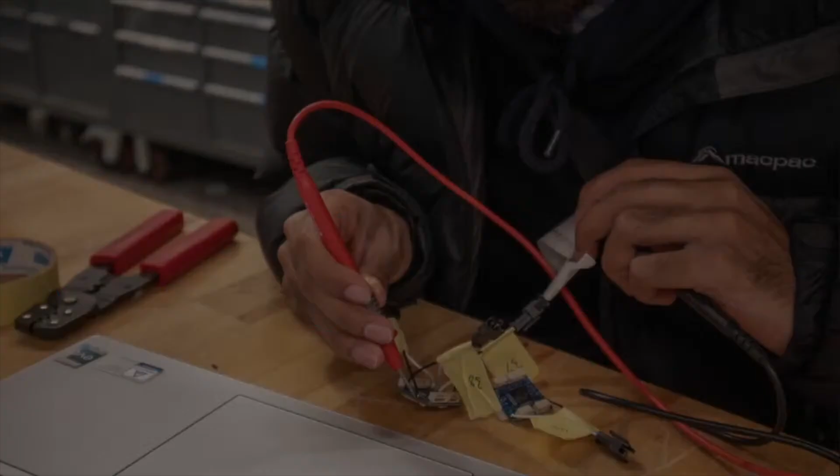The avionics section is responsible for bringing our aircraft to life, designing and implementing onboard electrical systems vital for the function of our aircraft. At the core of MUAS's search and rescue mission are many of the projects within this section. And as you'll learn tonight, the technologies they are developing have the real potential to advance drones in the humanitarian field. This team is led by Ethan and Emma.

Flight operations, led by Nicholas and Saskia, are responsible for turning designs into reality. They handle the final integration of systems, ensuring the aircraft is flight ready. During missions, they manage ground station operations, analyse telemetry and flight data.

Our incredible pilots oversee both manual and autonomous missions. They ensure safety and precision in every flight. This year, our lead pilots are Rohan and Hamish.

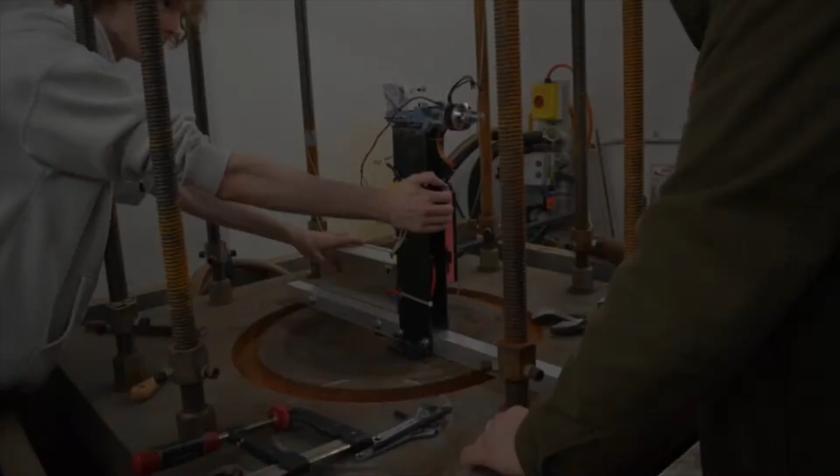Propulsion, led by Say, is a relatively new section, but despite that, this section will push MUAS further than ever before. By developing custom components, including motors, ESCs, propellers, and more, propulsion aims to outperform the off-the-shelf products that we have always employed, in turn improving our capabilities at competition. With the innovations of this section, our drones will fly further and faster than ever before.

And the section that holds us together, operations. From managing relations with partners, running outreach programs, recruitment, and general logistics, this diverse section ensures the smooth functioning of our team, this year led by Darren.

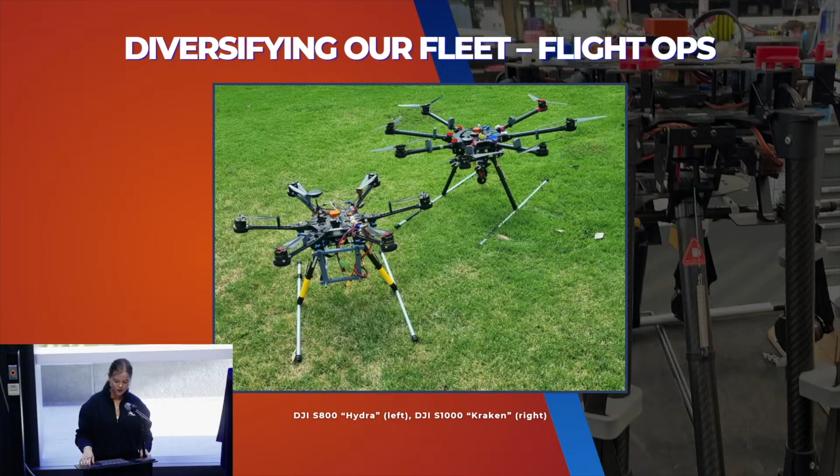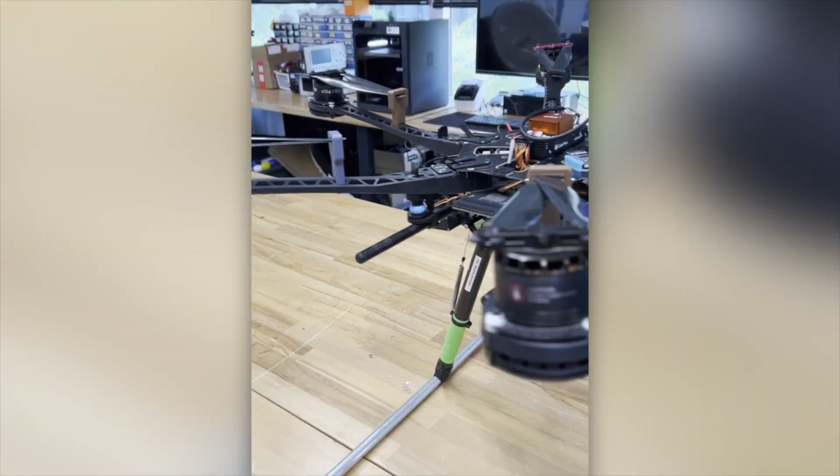Over the course of 2024, Flight Operations has modified our 2 existing DJI platforms, the S800 and the S1000, in order to allow avionics to test their projects. These drones have been adapted with Cube Pilot Cube Orange flight controllers, HERE 4 GPS units, and 900 UX RFDs, as well as other additions.

The S800 is our 6-rotor multi-rotor, also known as the Hydra. This drone has typically been used for testing the avionics vision projects, as well as helping to train our remote pilots.

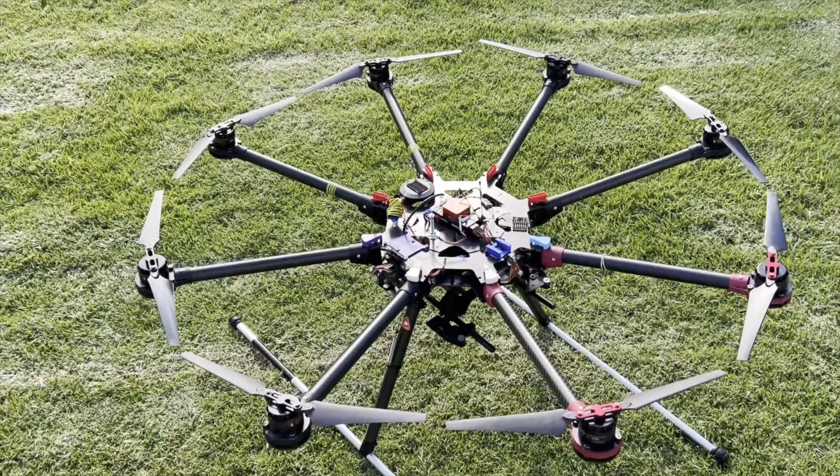The S1000 is our 8-rotor multi-rotor, also known as the Kraken. This drone has been used predominantly to test the avionics Lifeline project, but has the capability to test any of the avionics projects. Further changes have been made to some of the structural elements of this drone, such as adding mounts and redesigning the rotor arm clips, to better help flight operations do maintenance on the drone more easily.

Prior to having these drones, avionics required the team's previous drone, the Albatross, for all their testing. Due to the size and complexity of this aircraft, it proved inefficient when wanting to test these projects at short notice, as it requires a lot of equipment and personnel just to test a small upgrade to a project.

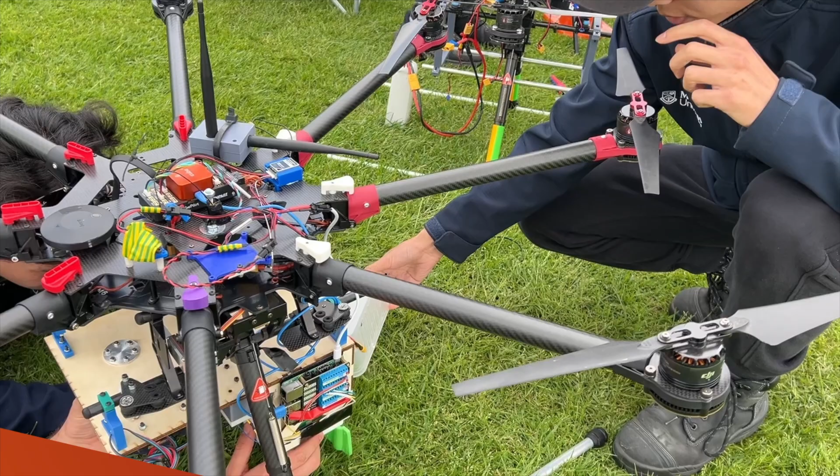In our pursuit of aiding humanitarian rescue, we are excited to present Project Lifeline. Initiated in 2023, Lifeline's purpose is to develop a robust payload deployment system that can deliver a box full of medical supplies from our aircraft to a patient in need on the ground during search and rescue operations.

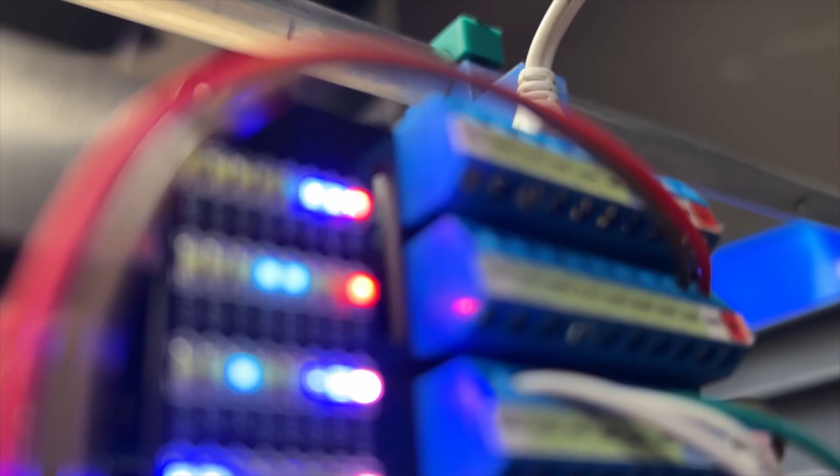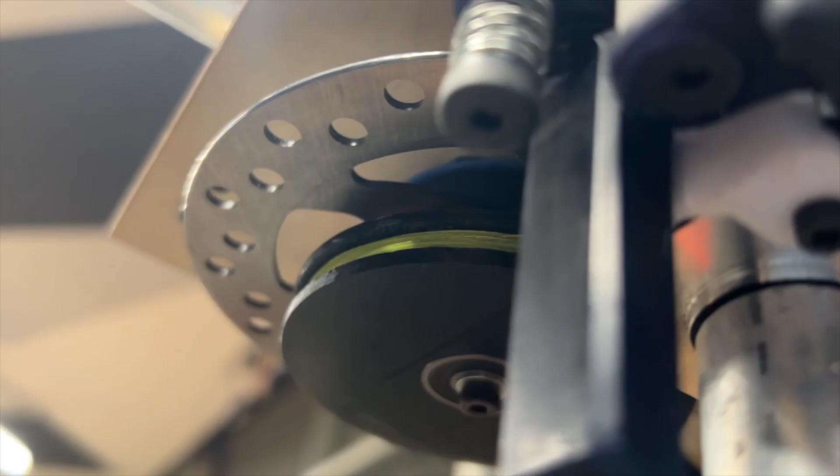The system is controlled by a Raspberry Pi, programmed to receive specific MAVLink signals from the ground control station and act accordingly. Once it is time, the payload will descend to its targeted location via a tethered freefall. Multiple PI control loops are employed in our braking mechanism in order to ensure a smooth and safe deceleration as the payload approaches the ground.

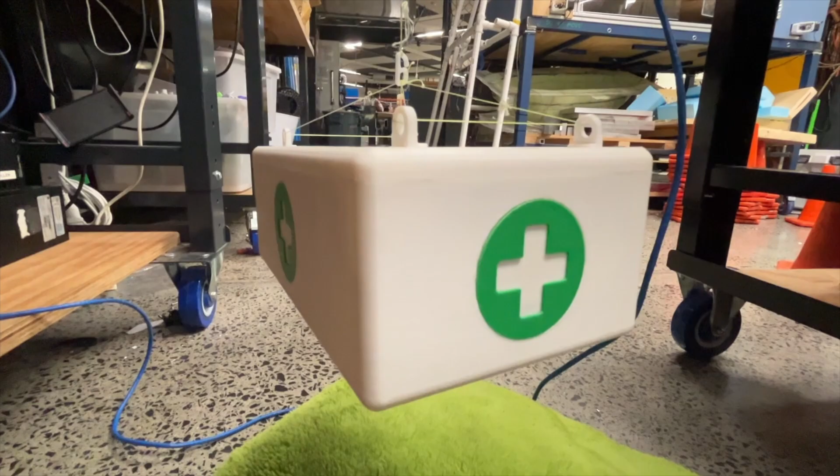Eventually, the payload will be slowed to a stop a few centimeters off the ground before our final release. Lastly, to fully release the payload from the aircraft, a nichrome wire is heated to burn and cut the cables in a fraction of a second, allowing the payload to fall onto the ground quickly and safely.

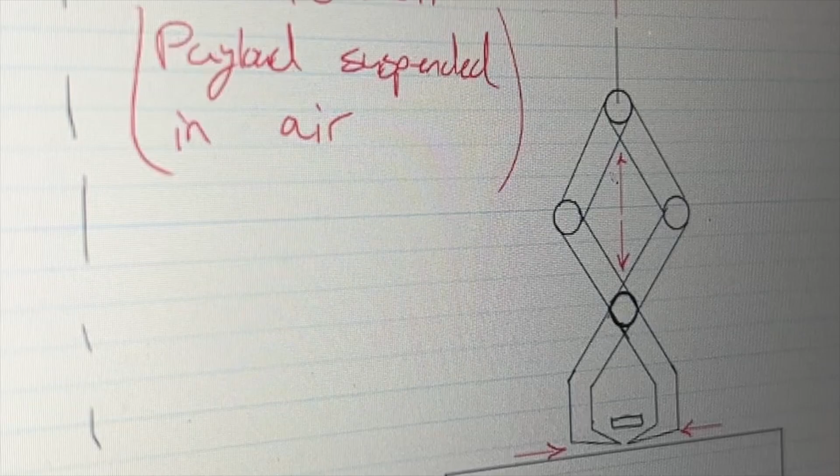Lifeline has come a long way since we started, and we are not planning to stop anytime soon. A newer, improved release system is being designed that releases the payload through a mechanical latch before winching the remaining cables back into the aircraft, eliminating cable wastage.

I'm excited to present the Vision Project, a system designed to detect patients and provide highly accurate GPS coordinates using artificial intelligence. This technology has the potential to improve search and rescue missions by enhancing our ability to visually locate key objects, such as patients in distress.

Over the past year, we've made significant progress in advancing Vision's AI model, software, and hardware. On the AI side, we've expanded our mission objectives and capabilities. Originally, Vision focused on detecting patients, but now it can recognize key objects crucial for rescue missions, including tents, backpacks, clothing, fire, and more. These additions provide more context and improve situational awareness during rescue efforts.

Software improvements include AI model switching mid-flight, which allows us to optimize detection based on various terrains. We've also begun developing a map generation function capable of creating a Google Earth-style map to help rescue teams locate the patient more effectively. On the hardware side, we've continued improving the gimbal system, which stabilizes the camera and allows precise directional control during flight.

We've also refined the mounting and dampening system to improve the quality of our footage. These advancements bring us closer to making Vision a powerful and reliable tool for real-world applications. Moving forward, we aim to refine these capabilities, enhance integration with rescue operations, and explore night vision functionality.

The competition consists of two main segments: performance and endurance. In the performance flight, our drone will be tested across a range of capabilities, as shown in the diagram behind me. This flight sequence includes a high-G maneuver, which in our case will be a vertical loop, as well as a controlled glide and two maximum and minimum speed runs.

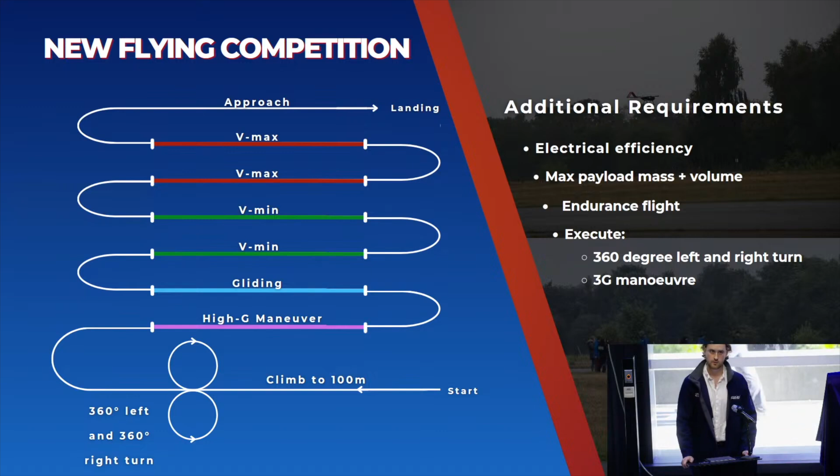Now, the endurance flight, while a seemingly simple concept, is one of the biggest challenges of the competition, and as such carries a significant weight in the scoring. Essentially, we must fly as far as we can using as little energy as possible. And for the first time tonight, I can reveal one key aspect of our competition entry: our aircraft will be a fixed-wing, conventional takeoff and landing drone. But that's all I can say for now, and more will be revealed throughout the showcase. Thank you.

With the NFC competition guidelines and requirements known, the team embarked on an incredible task of designing and building a brand new aircraft to compete. I don't know about you, but I've certainly noticed a rather large object in the middle of this room that we have yet to see. Well, all your questions will be answered shortly.

But before we get to that, we have put together a presentation that details the birth of our New Flying Competition, or NFC, aircraft—an aircraft called the Peregrine. From design to reality, here is how to build a drone. First up, please enjoy this short video on the initial conceptual design phase.

Here, we began to turn our early ideas and scoring optimizers into something real. Our mission at NFC 25 is to score higher than the hosting team in these categories, each with their respective weighting factor. After carefully evaluating the constraints, our priorities, and the design complexities of each category, we've chosen some to be our control variables and the rest to be parameters to optimize for.

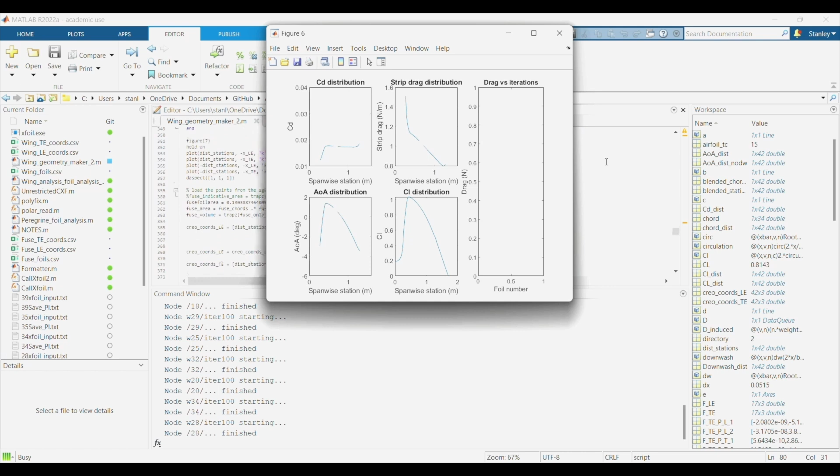With a few parameters to work with, we began development of our in-house optimizer, Athena. Athena is able to iteratively tweak the control variables, compute the dependent variables, and calculate the respective score using a method called gradient descent, a popular optimization algorithm often used for machine learning with multiple variables. In our case, this helps us determine the best configuration to maximize our score.

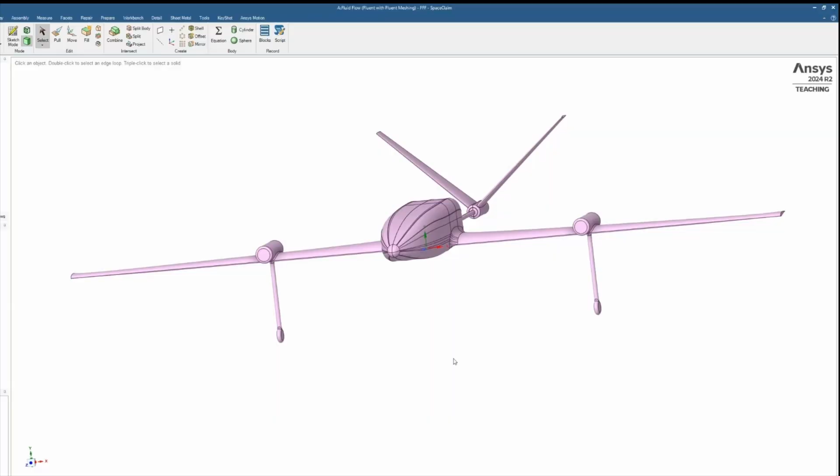Our team was able to create a CAD model parametrically with Athena's output as we moved on to a higher fidelity analysis with ANSYS's Fluent Computational Fluid Dynamics, also known as CFD software. CFD provides a better insight into the prototype generated by Athena, as our design team made subsequent adjustments to the geometry to ensure that the final model has similar, if not better, performance compared to the Athena model.

Hello everyone, I'm Say and I'm propulsion lead for this year. Propulsion has been hard at work for the past year since its conception. With a strong cohort of now 16 members, we have been diligently researching and developing our various components in the propulsion system. The past year has involved rapid development and growth of both our knowledge and technical skills in areas that have rarely been touched by us before.

We have managed to produce and test custom designed propellers and electronic speed controllers, and are very close to making our first motor. These are what we have done so far. From here, we plan to optimize our designs and improve our system as a whole by incorporating a constant speed unit into our system. This next section of how to build a drone will showcase our initial CSU and ESC designs and our current development on our motors, and how we have been aided by the use of FEA.

We will also be showcasing our propellers and how we have validated their performance on our thrust test stand, the Cassowary. Inverters, also known as ESCs, handle the driving and controlling of the main propulsion motors.

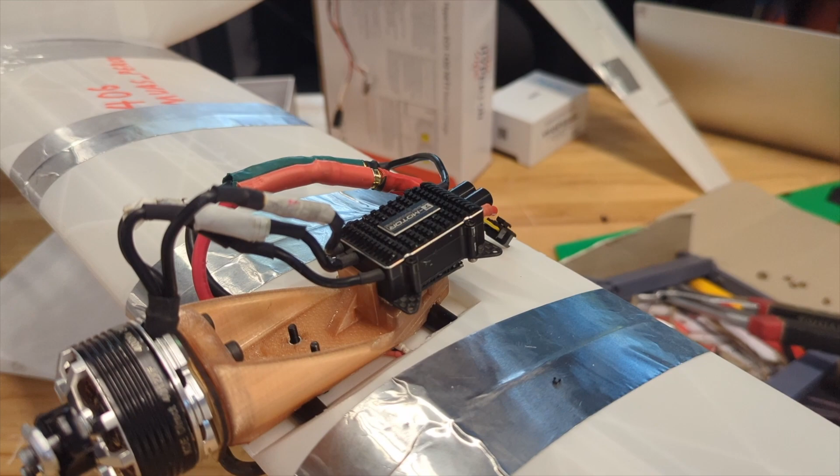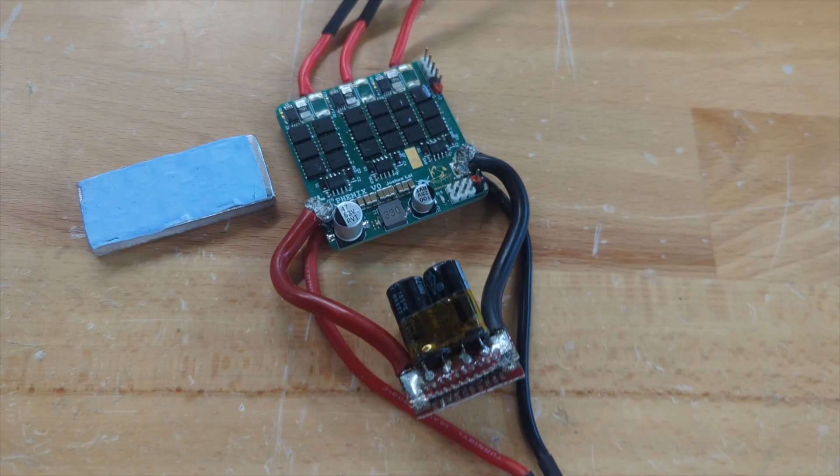The Inverters project aims to replace the commercial systems currently used on Peregrine and other UAVs with custom-tailored solutions that integrate the functionality of multiple previously individual systems to deliver greater efficiency, repairability, and value. Although we are a small project that was founded just last year, we've already delivered a proof of concept called Phoenix V0 that has validated our design, manufacturing, and testing processes.

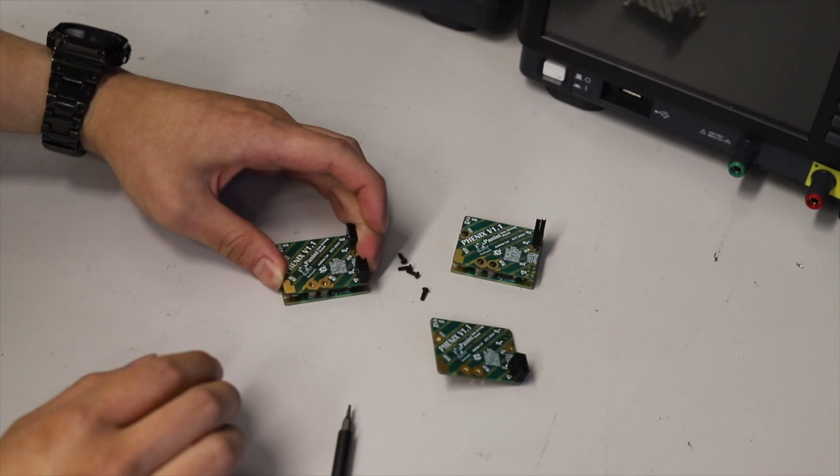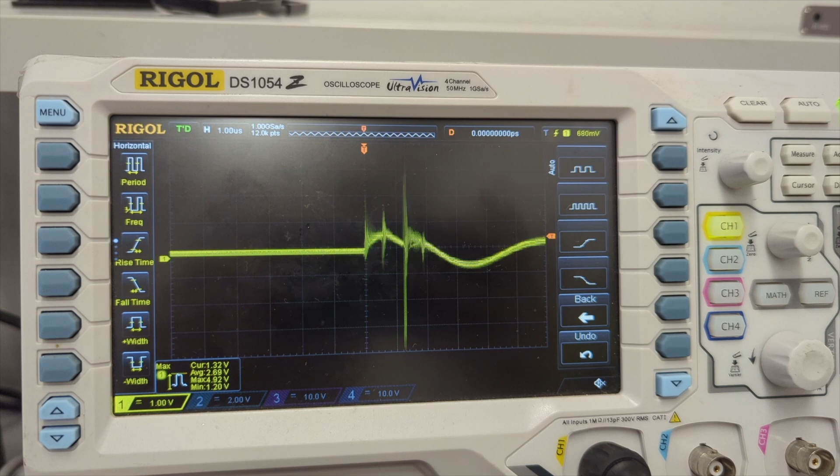We are currently in the testing phase of our next generation system called Phoenix V1, which incorporates a fusion of open source and in-house technologies that give us the edge over the competition. Our innovative modular design allows for fast testing and validation, as well as a unique level of configurability and repairability. Our integration of the advanced FOC algorithm with closed-loop control improves motor efficiency and torque across the entire speed range. All these innovations will yield significant improvements to propulsion efficiency, performance, and reliability. We aim to complete our design validation and have our inverters flying this year.

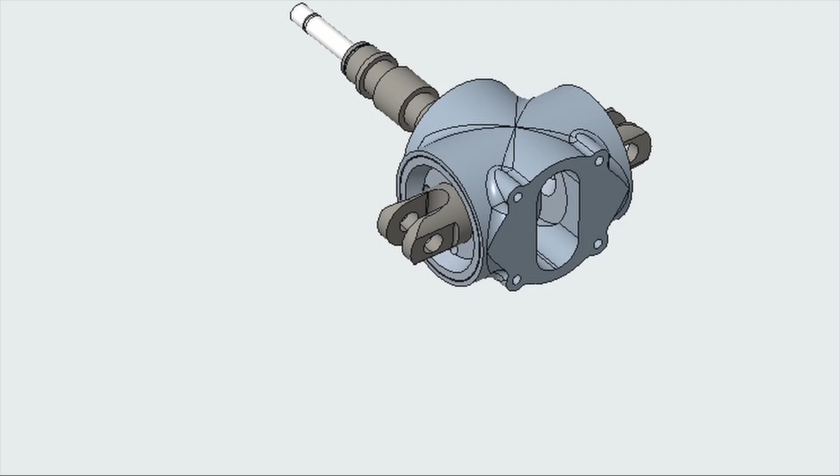The CSU, or Constant Speed Unit, permits the changing of a propeller's pitch during flight. While systems like this are plentiful in the full-scale aircraft space, and systems with broadly similar requirements are present in most RC helicopters, the high RPM and considerable pitch range needed to maximize our motor and aircraft's performance necessitated the design of an in-house solution.

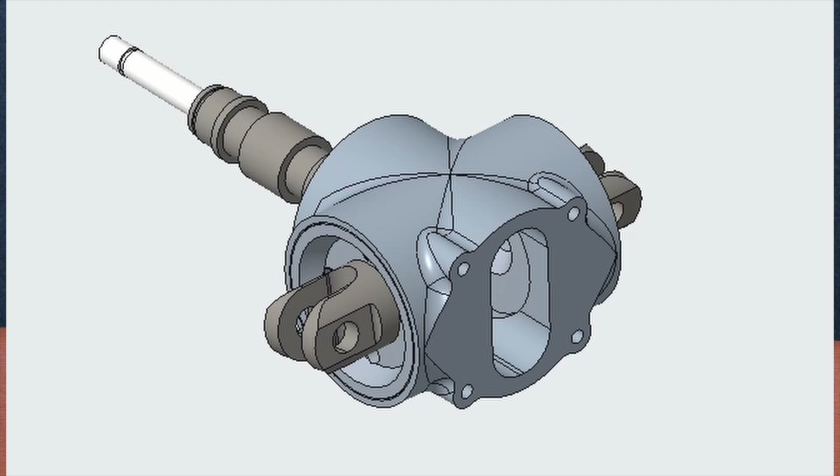With the ability to design and manufacture them in-house, we can optimize our propellers for any number of flight conditions, but to optimize a propeller for a range of conditions, it will always be necessary to make compromises as to the propeller's performance. By allowing both the speed and pitch of the propeller to be changed during flight, these compromises can be mitigated. In addition to widening the performance envelope of the propellers themselves, the CSU allows for some additional bonus functionality, like reversing thrust and prop feathering, which is intended to give the Peregrine a competitive edge in maneuvering flight. Combined, these features allow us to maximize our propeller performance in the efficiency component of NFC without having to sacrifice our aircraft's performance at the edges of its flight envelope.

In order to accomplish all of this, an extensive design cycle was undertaken.

The result is that the CSU has been carefully optimized so that no space or weight is wasted, key to both the success of the aircraft in competition and to the survival of the CSU during flight. Now it's time to make some props that get the best performance out of our motors and CSU.

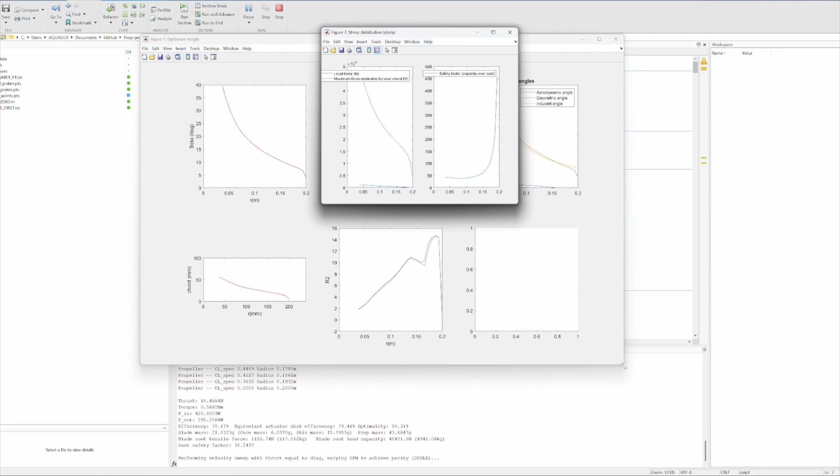Propeller design starts right at the basics, determining a desired performance of the propeller at a specific operating point. Once chosen, the necessary parameters are loaded into our custom PropCalc software. Written in-house by MUAS members, the program takes an initial shape and a desired performance.

Within a few minutes, it returns a propeller geometry optimized for our desired thrust and torque. Once we have our geometric data, it's onto the CAD phase. Here, we take the data produced by PropCalc and use it to create a 3D model of our propeller and a mold for it in Creo.

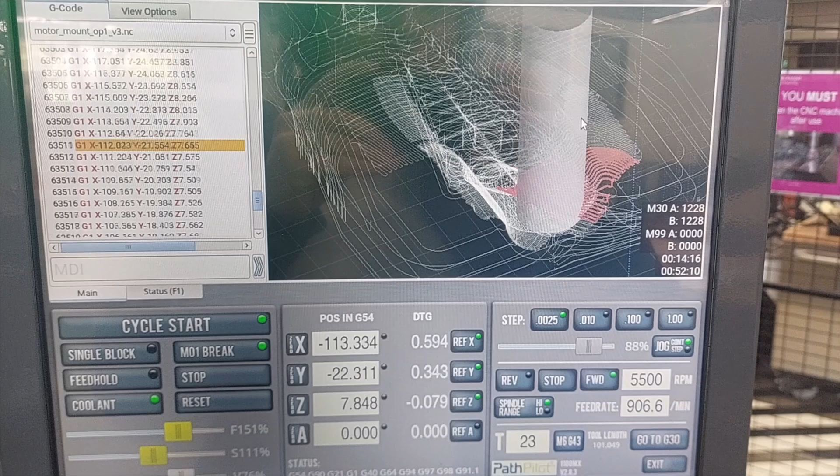The CAD for the mold is then converted into a CNC program and it's onto manufacturing. We load our program into the CNC machines and let them carve out the molds. Where rapid iteration is needed, machinable wax is used for fast and reusable molds, and where an established and mass-produced prop is needed, aluminium is a MUAS staple.

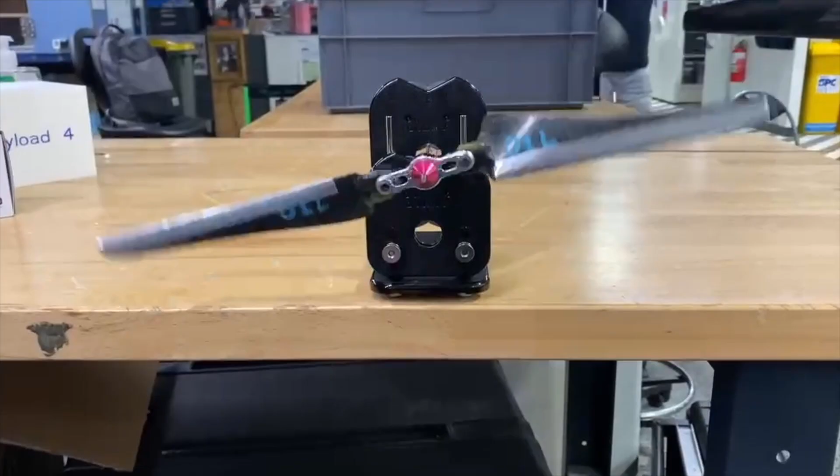After the mold is created, it's over to the composites bay to lay up the propellers. Our current designs are a sandwich of foam core with resin-infused carbon fiber on the outside. Once the resin sets, we can crack the mold, post-process, and now we have a brand new custom propeller.

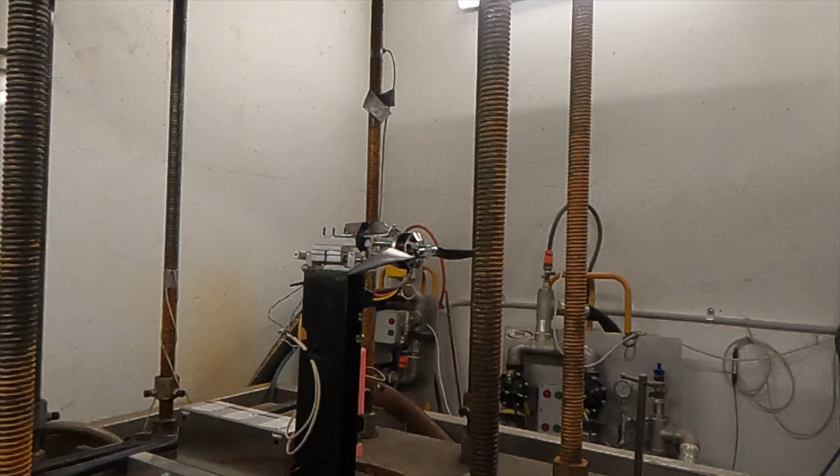The final stage of all propulsion projects is testing. To facilitate our ability to characterize the custom hardware, we have our thrust test stand. The stand is designed to log thrust, torque, RPM, current, and voltage. Not only is this data indispensable to our design cycle, but it allows us to know how our hardware will perform before we put it on the aircraft and take flight. This gives us and our pilots confidence in both the capability and safety of our aircraft.

If you consider aerostructures to be the bones and the skin of the aircraft, then you would consider avionics the internal organs. Our avionics systems could never function without an airworthy frame, and it would never fly without someone telling it where to go. In that sense, the power distribution board is the heart, pumping the right amounts of power to each auxiliary system.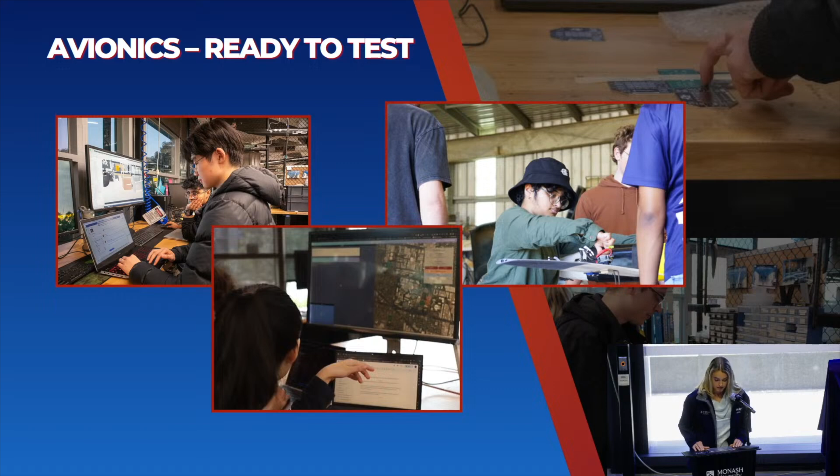Stack is the nervous system connecting all the components to the brain of our plane, and mission management is the brain, allowing us to monitor and control our missions. Now we would like to hear from our projects in greater detail.

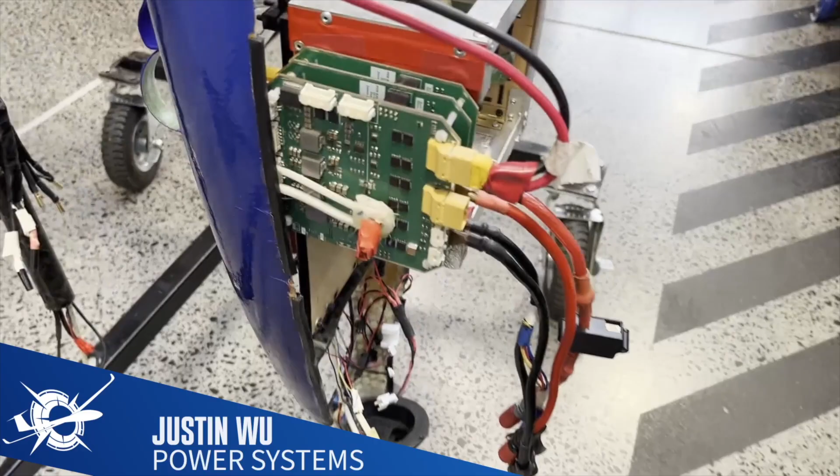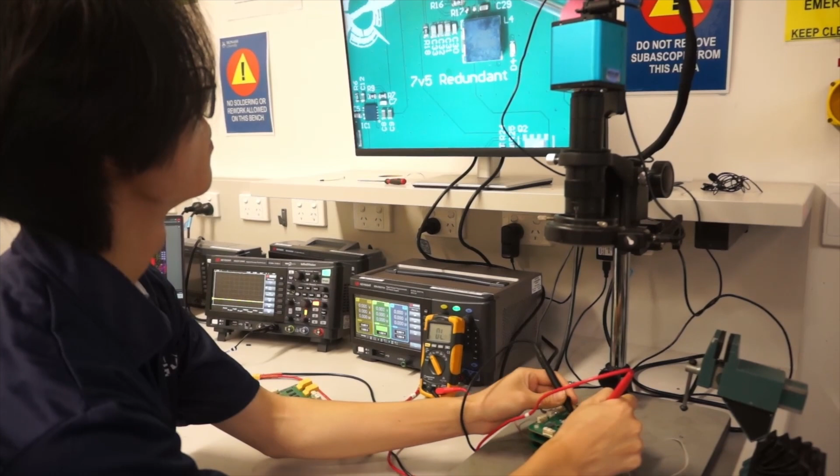The Power Distribution Board, or PDB, is a multi-board system designed to manage and distribute power efficiently on an aircraft. Each PDB comprises two main elements, baseboards and a daughter board. This modular system allows us to easily swap out the boards when needed. The baseboards take the propulsion batteries as input, supplying power to the motors and propulsion systems, whereas the daughter board takes in the avionics battery and supplies power to peripheral systems, such as servos and avionics communications.

This year, a brand new PDB was designed specifically for the NFC competition. The design process began with an investigation into the power requirements for the NFC motors and peripherals, as well as a revision of last year's PDB, the Albatross PDB. We've developed new and improved versions of circuits such as e-stop, current monitoring and temperature sensing, as well as a newly revised and more reliable interboard connection system.

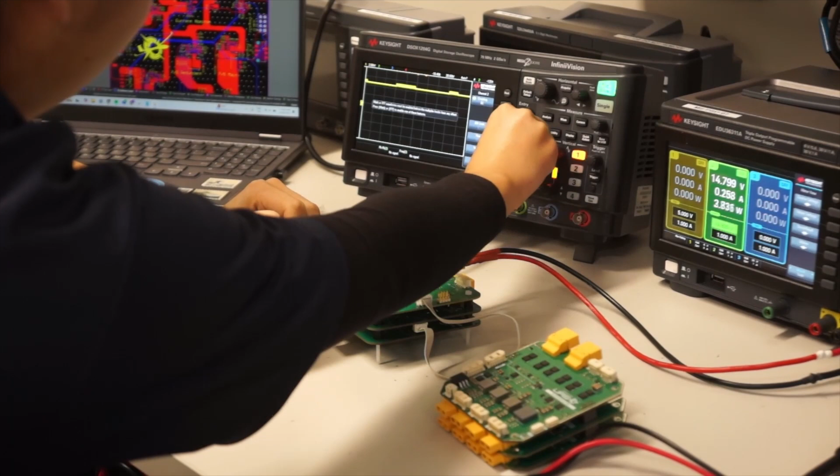Currently, the team is in the final testing phase of our second iteration, and we plan to use these findings from this testing to complete a third and final iteration, ensuring greater reliability and performance for the competition.

Stack works on connecting the electrical components on our aircraft and the communication both amongst them and back down to us at the ground station. We focus on the avionics in our competition drones, and our latest work on the Peregrine has been built on the knowledge learnt from our previous iterations and improved upon what has been done in the past.

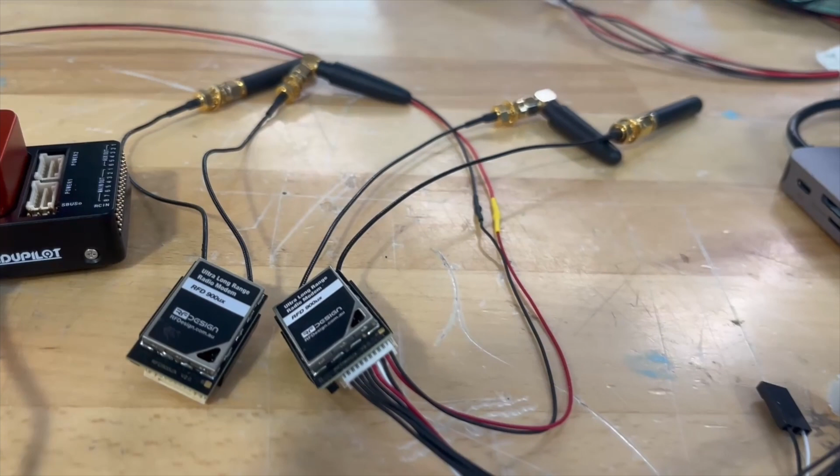Using RF Design's compact receivers and transmitters, we were able to set up real-time data transmission to our ground station in flight, with built-in and external sensors collecting information. The bulk of our work consists of connecting all of these components together physically, accounting for spatial restraints and interference.

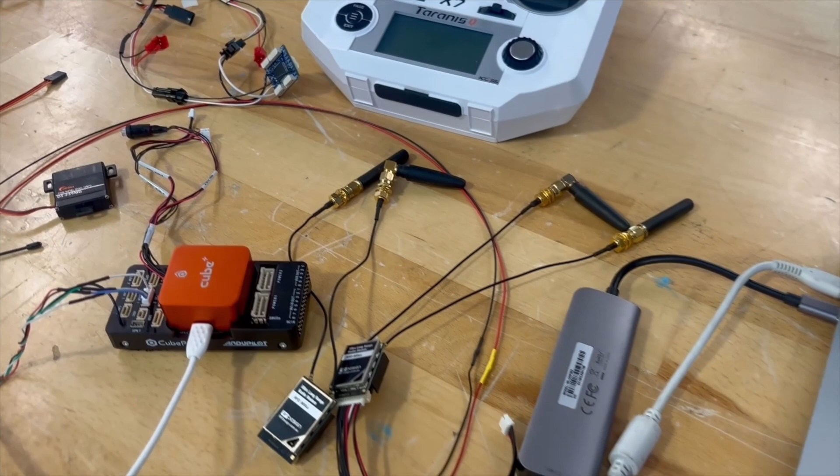Using our experience with the Albatross, we are working with Star Metal to optimize our harness with tighter wiring, sheathing, and stronger connectors, ensuring a higher standard of wiring. As the software platform that brings together and controls all of the avionics, mission management is constantly evolving.

Our preparation for NFC has brought us back to the drawing board with a redesign of the graphic user interface. For NFC, the drone will have to undertake a series of complex maneuvers. Once implemented, the new GUI will gather all critical drone data into one easy-to-read display, so that the pilots can

track the drone's state as it attempts these maneuvers. New components on the GUI will show the drone's airspeed, altitude, and the G-forces acting on the plane. In addition, the team is currently developing code that allows these maneuvers to be performed via autopilot instead of manually, which reduces the risk of human error. Instead of manually pulling off a tricky turn or loop, the pilot can simply set the autopilot to handle it. Automating the drone's flight will result in a more consistent performance and allow pilots to easily make changes to maximize our competition score. These new features are now being tested on the Mark 1 Peregrine, our current prototype fixed-wing aircraft, and every flight brings us to a closer, smarter, more autonomous system.

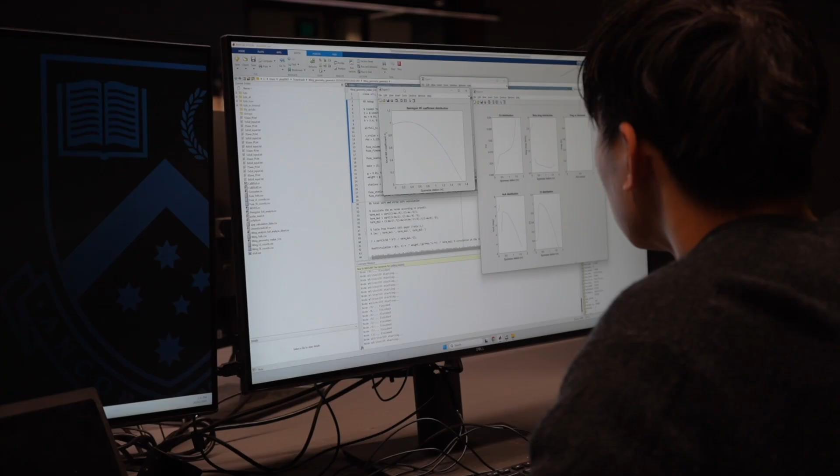One of the biggest challenges in developing an aircraft is that simulations alone cannot fully capture complex aerodynamic effects and aircraft stability. While computational models provide valuable insights, real-world testing is essential to validating a design. To address this, our team has developed a 2/3 scale, 3D printed remote control aircraft for refining our final design, dubbed Peregrine Mark 1. A key advantage of Mark 1 is rapid prototyping.

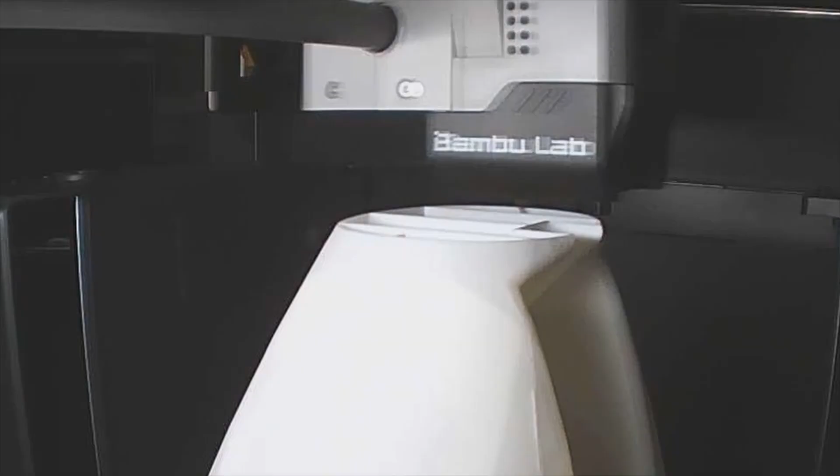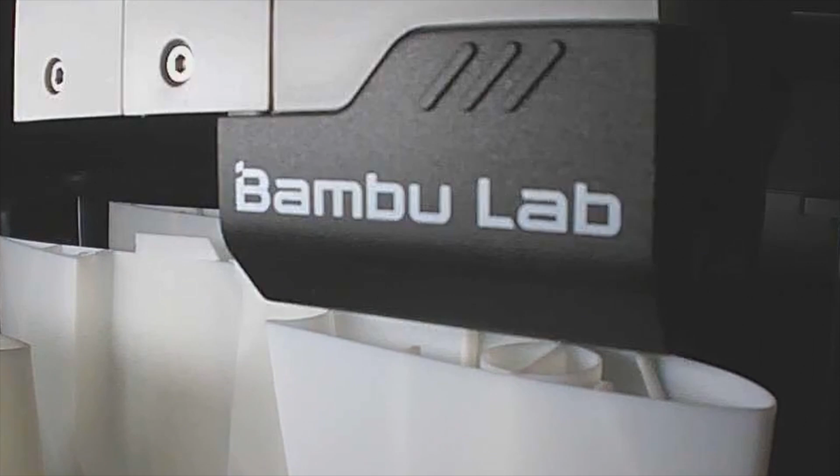Our digital model allows us to make adjustments on the fly. Once adjustments are made, the affected subassemblies can be reprinted, replaced, and ready to test within days. The aircraft is designed for ease of maintenance and repair. Mark 1 features a modular assembly, allowing most components to be detached and replaced without the need for adhesives. Moreover, the 3D printed structure absorbs the impact forces in the event of a crash, protecting key components like the battery, motors, and flight control systems. In the event of a total loss of airframe, a new aircraft can be printed, assembled, and ready to fly in under a week,

minimizing downtime. By combining lightweight additive manufacturing with real-world testing, Peregrine Mark 1 bridges the gap between simulation and practical validation, enhancing testing efficiency, reducing costs, and accelerating the development of our final aircraft. The Mark 1 airframe represents a significant step forward in MUAS's aircraft management, motivating our flight

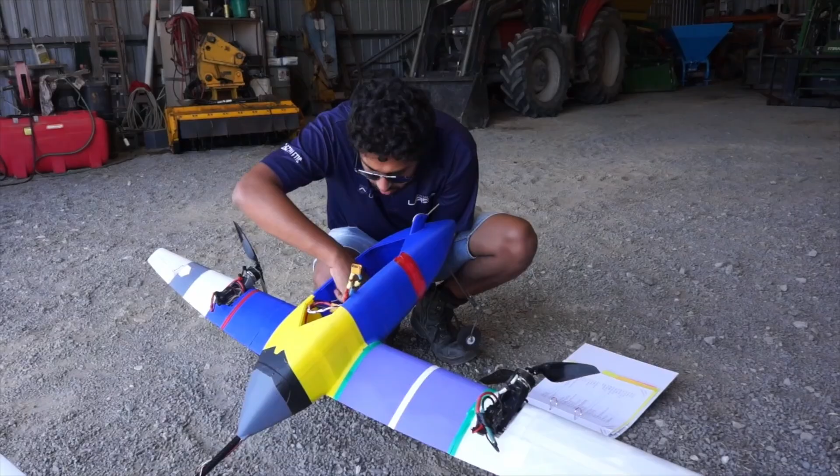operations team to develop new assembly and logistical techniques for managing a completely 3D printed craft on this scale. From organising new transport options to refining and formalising our construction processes, we've learned to adapt and grow alongside this airframe. For us, the craft represents an opportunity to push our tests to the limits, knowing that repairs can be done in the field with replacement parts.

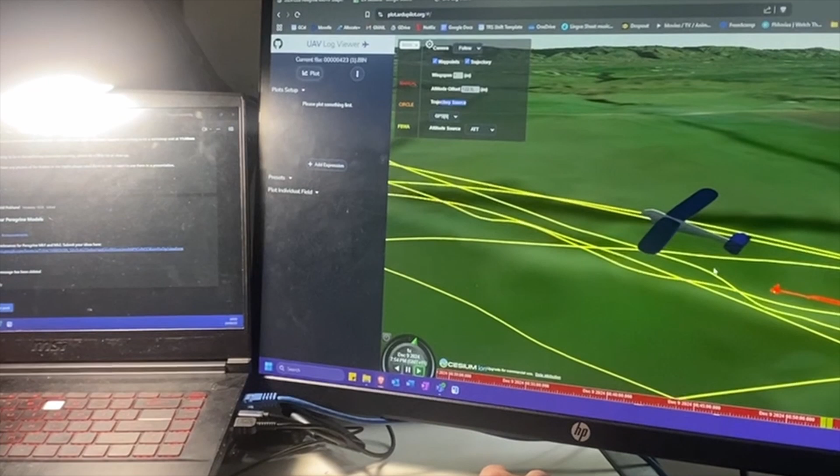Mark 1 has also given us a chance to analyse fixed-wing flight in more depth than ever before, observing the performance of our fly-by-wire system by studying our flight data and building digital recreations of the exact flight. Thanks to Mark 1's ability to rapidly iterate and evolve, we were able to implement a three-stage process to the design, where we started off with the catapult launch glider before adding a propulsion system, which allowed us to maintain steady level flight, while finally moving to its final form, which includes a tricycle landing gear system.

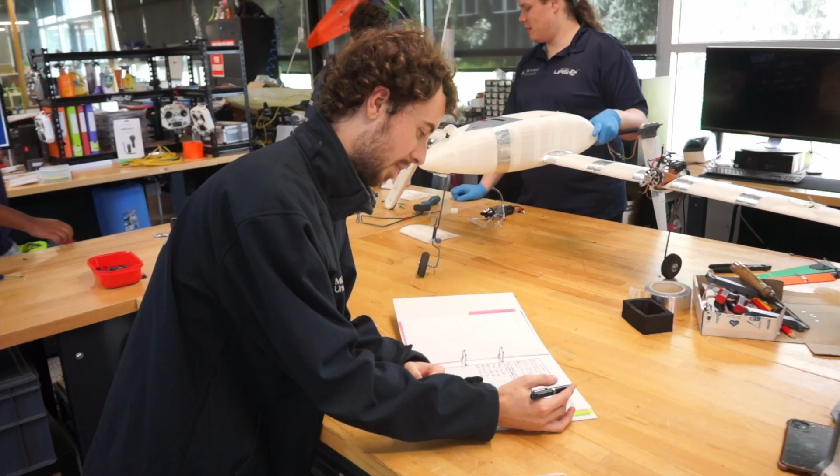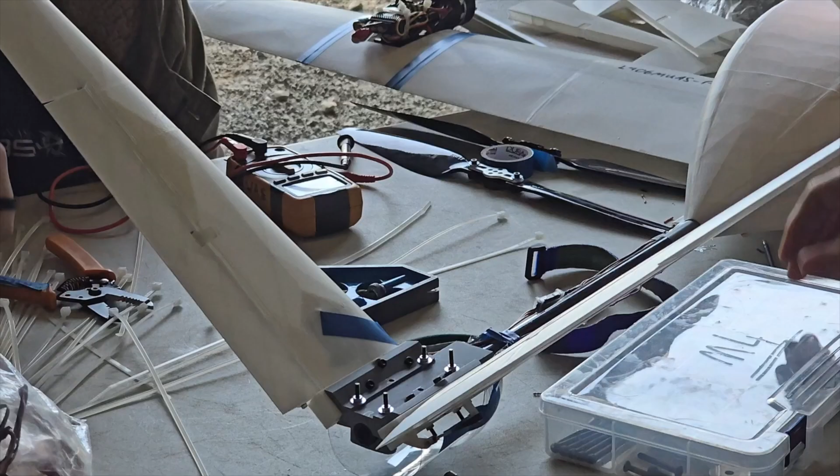This process allowed our flight operations section to refine and improve their processes as we stepped through the phases of the airframe. One such example being the implementation of maintenance releases, which allowed us to keep track of all aircraft abnormalities that could affect testing. Mark 1 also allowed us to experiment with many parts of the aircraft's final design, such as control surface sizing, wing position, and many more parameters. Overall, Mark 1 represents a big leap forward for the team in terms of its flight operations and real-world testing procedures.

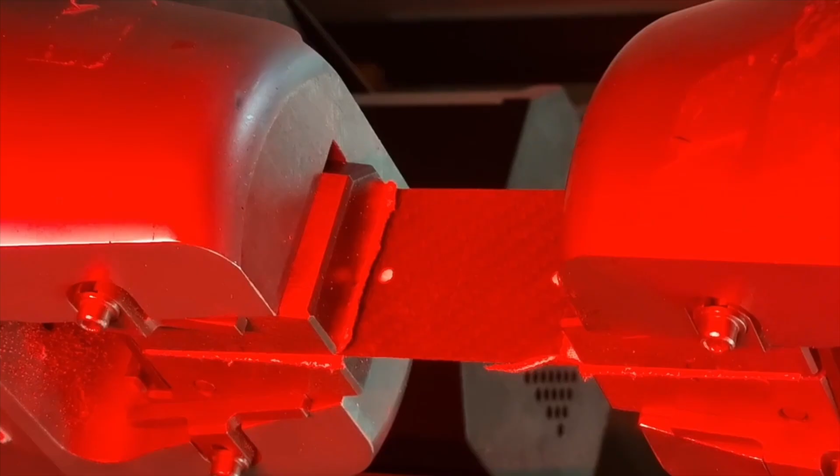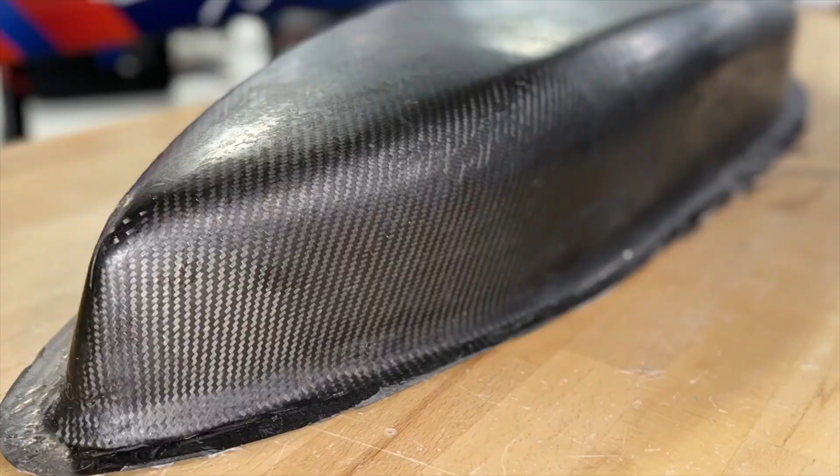As a result, we manufactured a predominantly composite aircraft, achieving exceptional strength to weight ratio with the support of Ironbark Composites. The past year has delivered some of the team's best manufacturing results to date, evident in our beautifully finished wings, skins, lightweight yet durable spars, and incredibly strong fuselage.

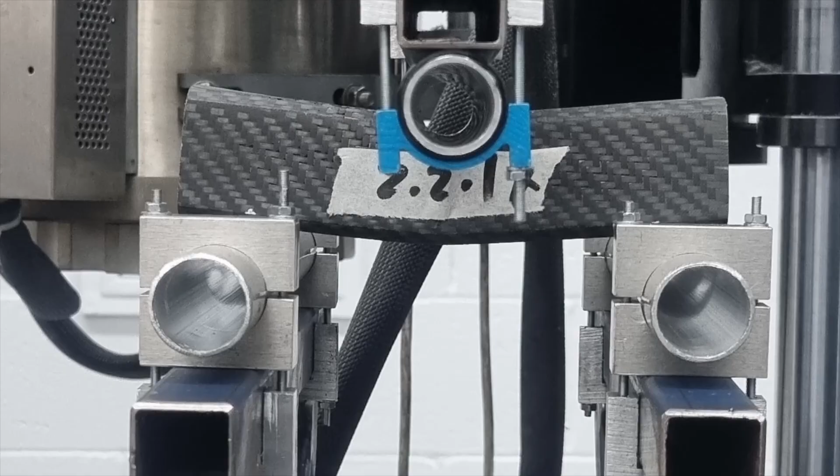Also integral to maximising the strength to weight of our wings was the design of the spars. Starting with many learnings from the Albatross's design and a desire to innovate, we set down a path of testing different cross-sectional shapes. To do this, samples were manufactured and destructively tested. This began an iterative process, which in the end yielded a pair of C-section spars, a shape we haven't used before.

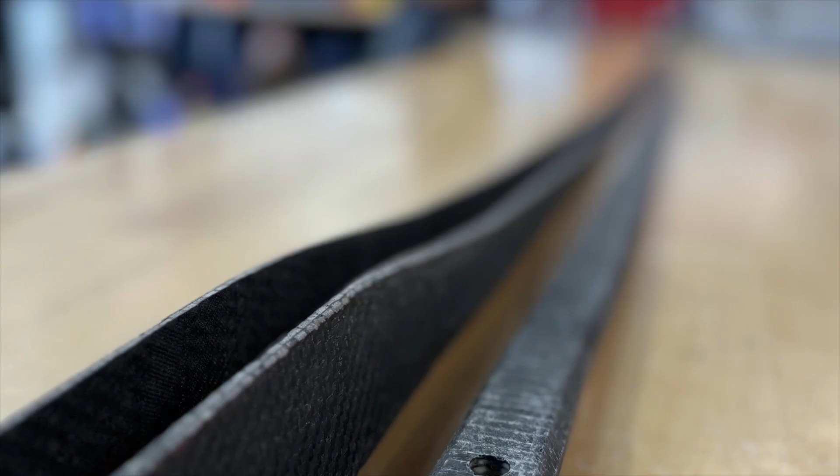There has been incredible progress in the manufacturing of the wings on the Peregrine. Despite being larger, they weigh barely more than half of the Albatross's wings, our previous composite aircraft. The use of well-engineered jigs provided control when bonding the wing skins onto their internal structure, minimising the amount of adhesive required for optimal load transfer.

In optimizing the physical control systems for this new aircraft, we encountered challenges at every step. The first roadblock was embedding aileron hinges into the composite wing skin. Our initial attempts using Kevlar disappointingly failed fatigue testing, but switching to nylon fabric with its high flexibility and abrasion resistance saved the live hinge concept, thus allowing us to eliminate gaps and improve high-speed efficiency while reducing weight by over 50% compared to ailerons we've made in the past.

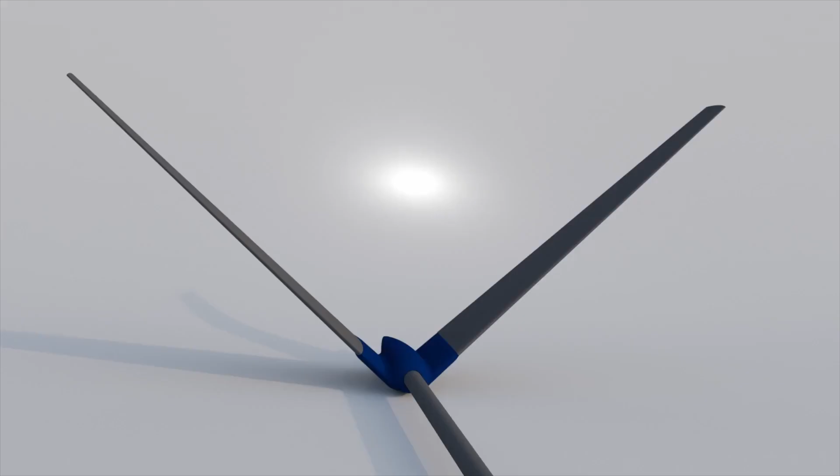The other major issue we came across was discovered in the Mark 1 aircraft and its struggle to take off. The original tail had insufficient pitch authority and was prone to failure due to the concentrated stress where the control surface cut into it. With a need for more control surface area and little tail left to cut into, we pivoted to an all-moving tail surface.

While inspired by past design, this solution is innovative in its ease of disassembly while having all the added complexity that comes with the V-tail configuration. With this design, we aim to achieve greater degrees of control while improving overall aerodynamics, all while making it more durable.

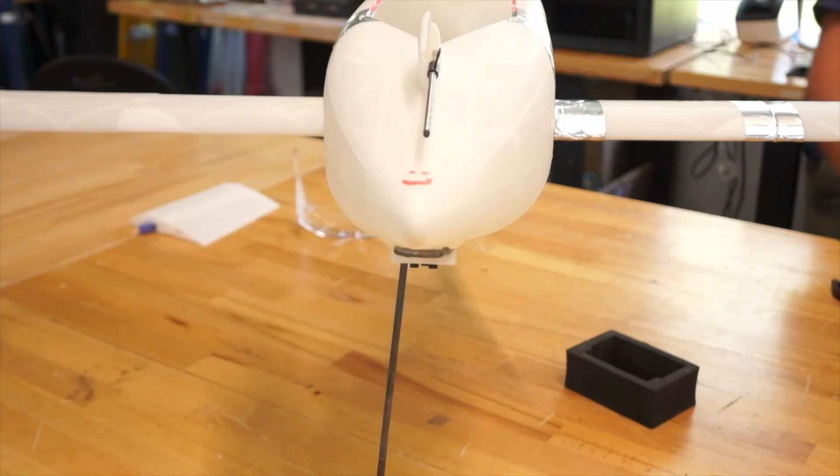After much work, we designed and tested a highly optimized landing gear, which is a great mix of traditional and innovative technologies. Initially iterated through existing solutions, our first take on this project was to make a rear landing gear with a 3D printed TPU spring. Unfortunately, decisions to minimize the weight of our wings made this solution infeasible.

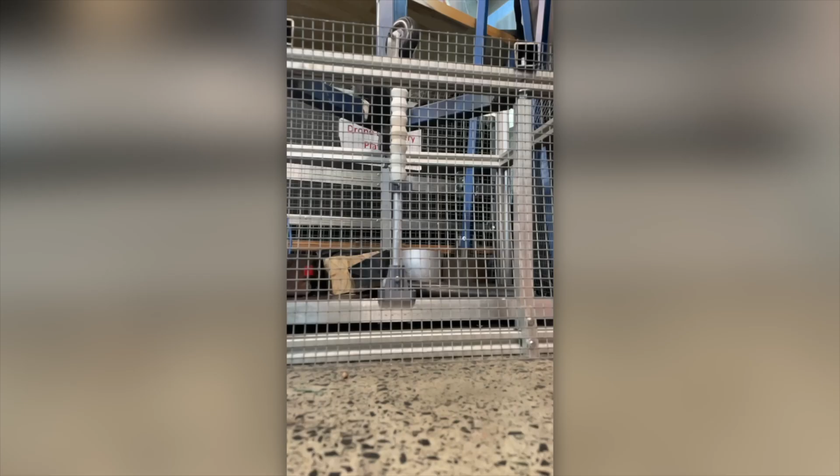Onwards, we started developing a version 2, a carbon fiber leaf spring design. Unfortunately again, after destructive testing, we were told no by our data, as the CF test pieces and some numerical simulations indicated our mass would have to be too great to achieve a successful design.

And so further, we thought up a version 3. It was the best of both worlds, a 3D printed TPU block with a levering landing strut. This design allows for our aircraft to be decelerated by the elastic properties of the TPU, with the block placed near the hinge of the lever. Its main benefits are its low weight and consistent functionality.

Finally, after so many designs, we found one which worked. For the nose gear, which takes significantly less force on landing, we came up with a simple caster wheel design that has worked well and allows for smooth taxiing of the aircraft.

I'm going to turn this around before I break it.

All right, Tom, I reckon we've built enough suspense. What do you reckon? I think I agree. So without further ado, please see the Peregrine Mark II on the screen.